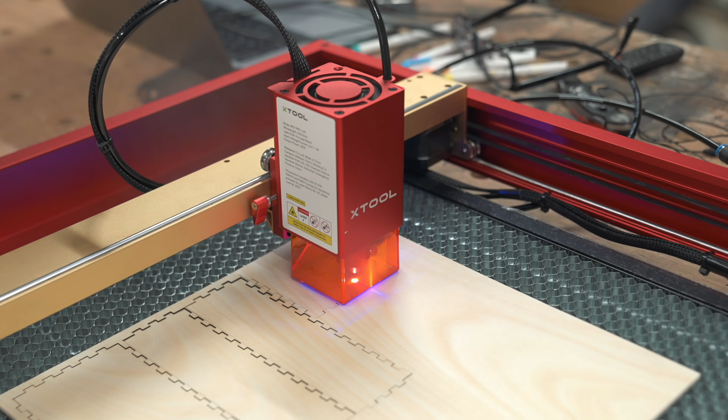A few years back, I built this office cabinet and then later made some drawer organizers using my laser cutter, which at the time worked great. But then over the years, I just started tossing anything in there as long as they fit the different size cubbies. And in the end, I was still having trouble finding exactly what I needed because this right here just doesn't organize anything.

So in this video, I'm going to show you guys how to easily model and 3D print custom organizers that give everything its dedicated spot so that they're always easily accessible, and more importantly, I know exactly where everything is. This is the epitome of a place for everything and everything in its place.

And of course, there are several ways to go about creating these custom bins. The easiest is just using the Gridfinity system that was developed by Zack Freedman and downloading pre-made models from their huge library, which is a great way to get started. But for me personally, I don't like to be tied down to someone else's design because what works for them or how they like to have things laid out might not work for me.

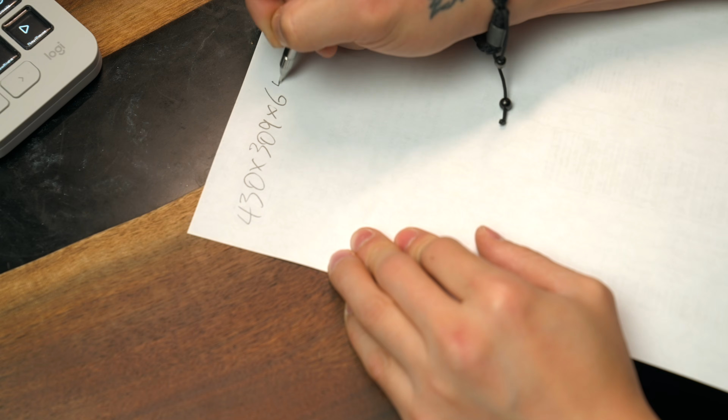And also, I have things that have a unique shape that doesn't have files available online, like the Space Mouse Pro that has this varying taper around the bottom, which we're gonna get into a little bit later in the video. But first things first. Using those dimensions, I sketched out a rectangle inside of Shapr3D, created an offset for the drawer thickness, and extruded it to the height of the drawer box. This sets the outer boundary of the space I may be working with. And now we're ready to start creating our custom bins.

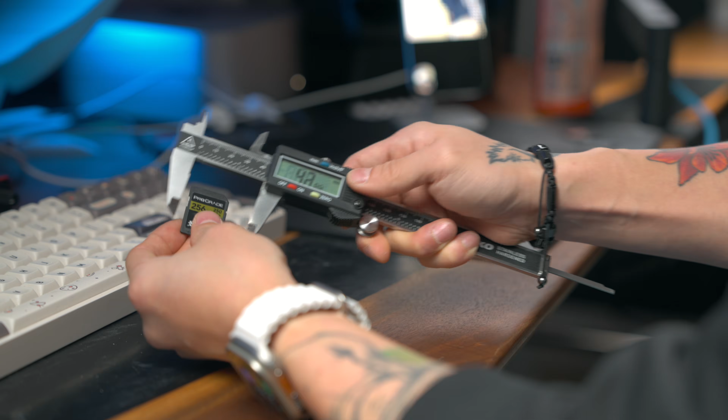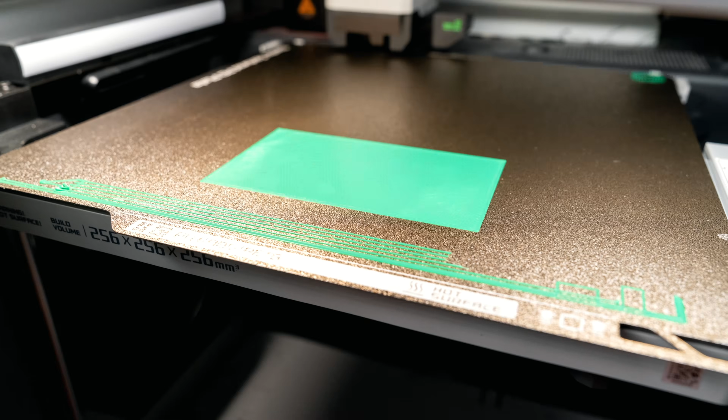So for things with a simple geometry like my storage drives, the easiest would just be to use calipers and a ruler. And after roughly laying out the drives, I went back into Shapr3D to sketch a rectangle and extruded that to make the base. Then on the top surface, I sketched a few more rectangles with the dimensions of the storage drives I measured earlier and pushed those down to make the cutout. And storing them vertically helps to maximize the storage space.

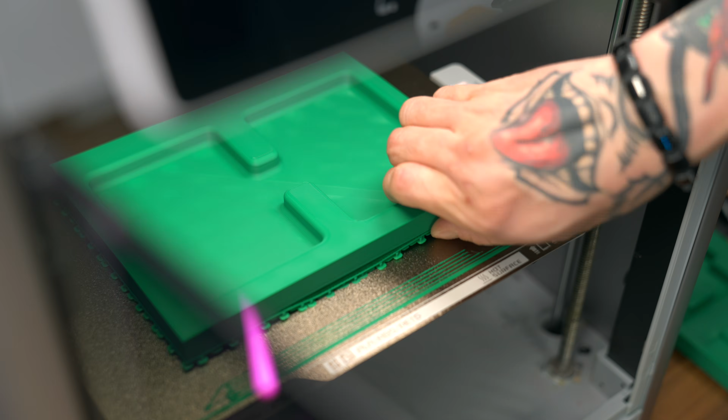Now for other objects that are also flat but they're just too large to sit in the drawers vertically, like this Apple trackpad, we can take advantage of the height and stack other flat items on top, like these portable power banks. And of course, we don't always need a custom bin for everything, right? So for these highlighters, on top of that is my favorite pencil, along with some refills and a wall charger.

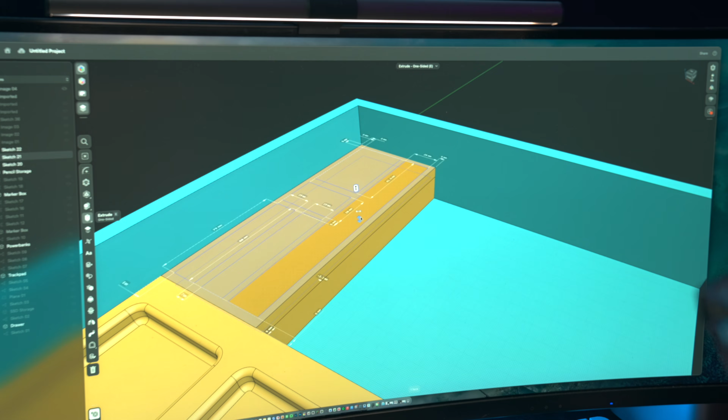Now, for all of these items so far, all I've been doing inside Shapr3D is sketching a rectangle, extruding it into the base, and then pushing profiles into it to cut out the basic shapes I needed for storing these items, and then pulling sharp edges to create any roundovers I might need. But for things with a more complicated shape, like this caliper, I use my phone to take a picture with at least 2x zoom to minimize any distortion, making sure that the phone is level.

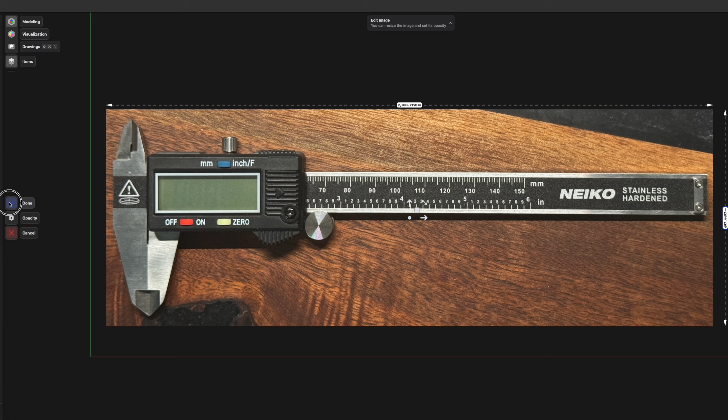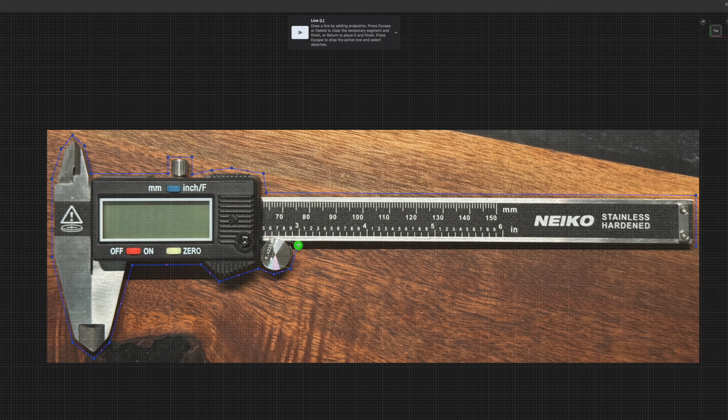After importing the image into Shapr3D, I sketched the line representing the actual length of the caliper and then adjusted the size of the image until it matched that dimension. So unlike before where I just used the rectangle tool to create the pockets in the base, this time I'm using the line tool to trace the image of the caliper, leaving about 1mm of space around all sides for clearance. The final profile is what I used to cut out the space I needed, and I also added finger holes so that I can easily grab and take out the tool. And once that's done, I also added space for my camera tool and a foldable ruler to the same print.

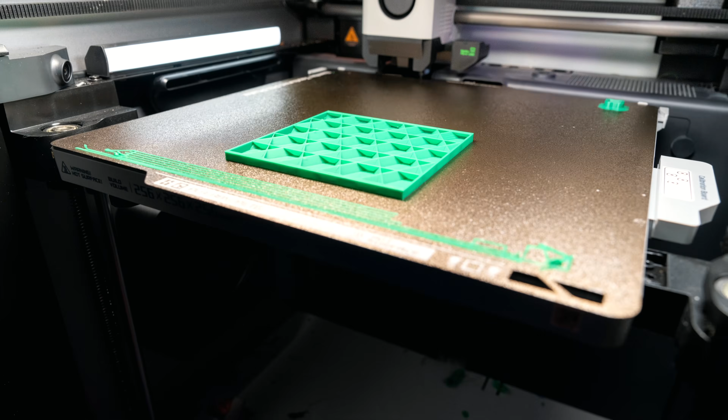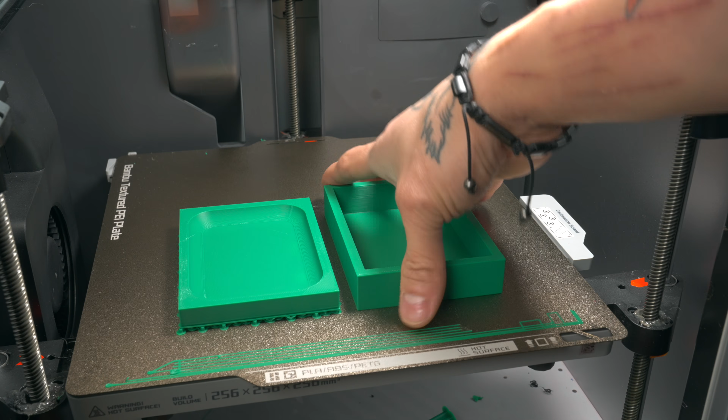I used that same method to create the storage for holding my wireless Space Mouse. And as you can see, we still have this little space we need to fill in, and I don't really know what I want to store in there yet. So for now, it's just going to be a couple bins for random things. Another miscellaneous bin for some smaller items, and a custom bin on top for my multi-tool and a couple of remotes.

So even when we're making a custom cutout for this guy here, we're still more or less using basic shapes, right? We're using straight lines and then we're extruding straight down. But like I said earlier, what if we want to make a custom recess for something like this, where the side face has this varying taper as it wraps around the unit? And at the time of me making this video, I have not found any 3D models of this guy or any custom bins on any of the 3D printing websites. So if we want to create a recess for this to sit perfectly into, we're going to need a 3D scanner.

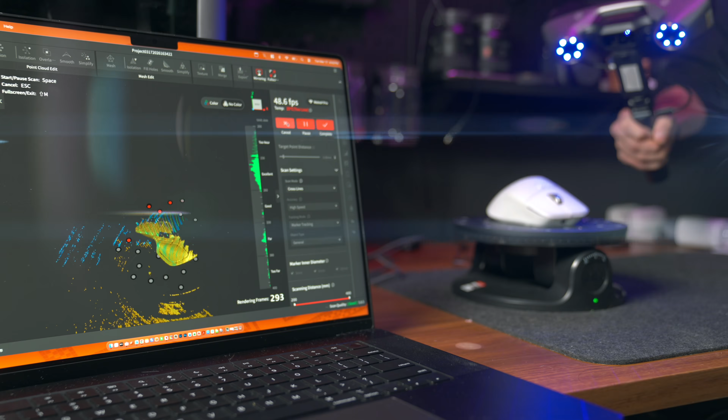This is the MetroY Pro 3D scanner that Revopoint sent me a couple months ago. It's a wireless blue laser scanner that's capable of capturing 2 million points per second. And usually if we're scanning a black shiny surface like the one on the Space Mouse Pro, it would require pre-treatment with a 3D scanning spray, because a black surface absorbs all the light while the shiny surface scatters the light away from the sensor. So this is possibly the worst case scenario for something like this.

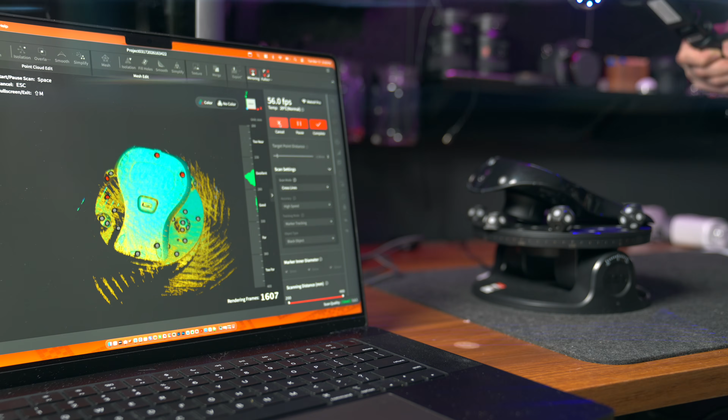But with MetroY Pro's advanced multi-line blue laser technology, I was actually able to get highly accurate scans of the surfaces without using any type of spray. Also, there's this new high-speed scanning mode, which relaxes the stitching angle tolerance, meaning that we can tilt the scanner further so that it's easier to get high-quality scans even when we need to make large turns like I do with the Space Mouse. So keep in mind that we're only creating a void for this part to sit into, which means we only need the data for the bottom face and the side face.

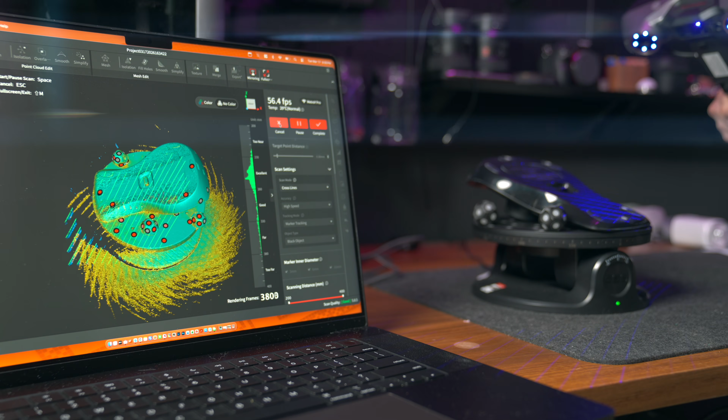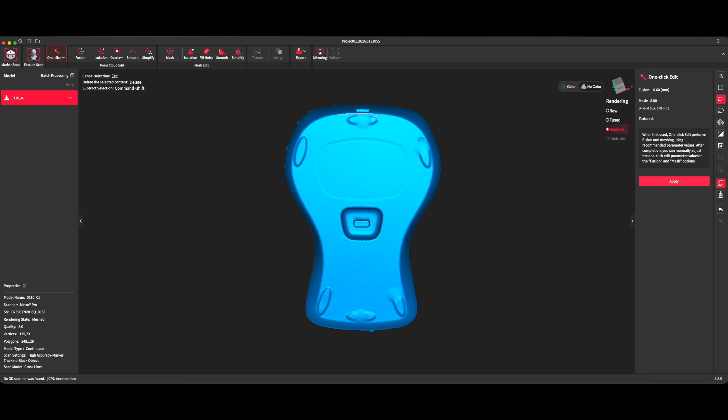So once I saw the model is all filled in, I meshed the data using the one-click edit option. The data, of course, also includes the rotating base. So to get rid of that, use the select connection tool, click on the Space Mouse, and then click on delete unselected content, making really quick work of that. I also use the polygon tool to pick and delete any details I don't need for our custom bin, like the feet on the bottom, the USB dongle, and the power button. And this process doesn't have to be perfect, but we do want to make sure that all the holes are filled in afterwards.

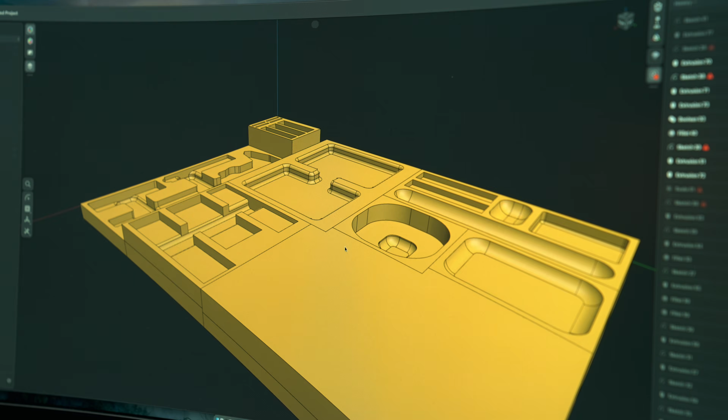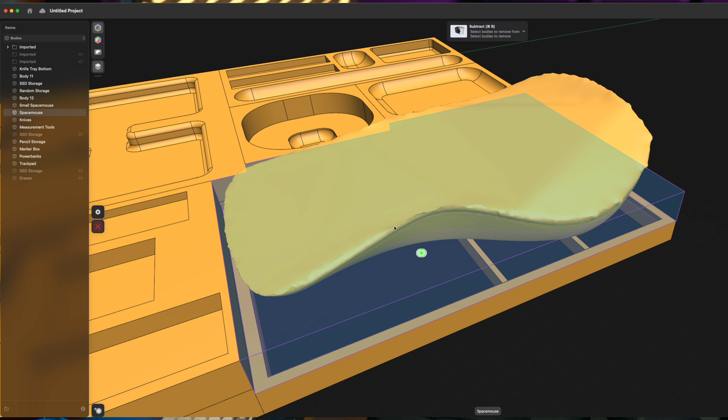What I love about this method is that once the mesh is imported into Shapr3D, or I guess any CAD program for that matter, it's already at the correct scale. So all we need to do is move the mesh into the position we want and increase the overall size just a little bit, because we are creating a void for the part to sit into. And I found that 1% was perfect for this case. Finally, using the subtract tool inside of Shapr3D, we can remove the mesh from our base and send it.

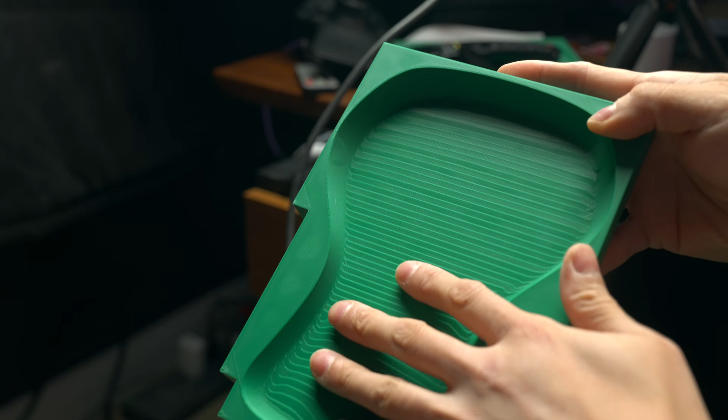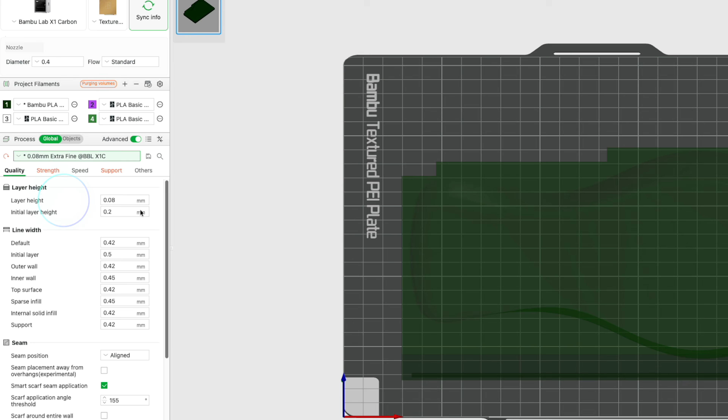So despite how perfect the Space Mouse Pro sits in the tray, you probably noticed that this bottom surface is quite rough. And the reason for that is because this surface is actually sloped, because I wanted this guy to sit in here at an angle. And since conventional 3D printers print objects in layers, what you see here are the layer steps for creating the sloped surface. One way we can smooth this out is by reducing the layer height, but unfortunately that's going to increase your print time and material usage. And even then, it's only going to make this a little bit smoother. So if we want to completely get rid of this, we have to

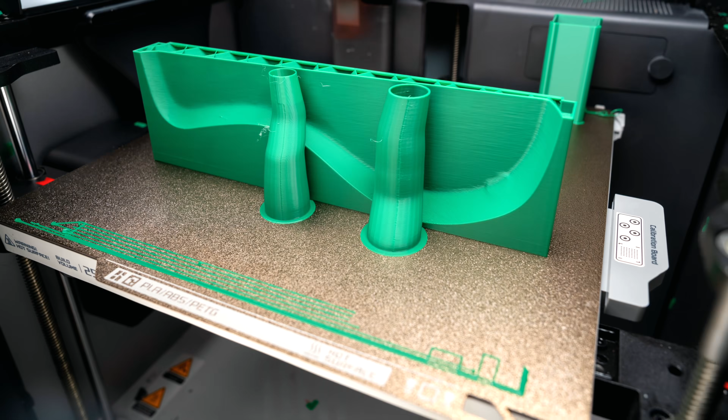The prime tower fell, so the print got a little bit rough at the end, but as you can see, printing this vertically completely removed the layer steps because it printed the slope on a single layer. But as you probably saw, we also had to add supports, which once again were adding to the print time and material usage. So was it really worth it? In this case, probably no, because all I wanted to do was create a custom pocket for this guy to sit into, which it does.

So that was my very first time using a 3D scanner, and to be quite honest, I was very surprised at how fast and easy the whole process was. And I was using the high-speed scanning mode, which allows me to tilt the scanner at a more severe angle and still get high-quality readings from the markers. So I think they said 30 degrees now, whereas in the past I had to keep the scanner at 90 to 45 degrees, somewhere in between that. So because now I can tilt it more, I can transition to the other faces much smoother, and that was really helpful for this case.

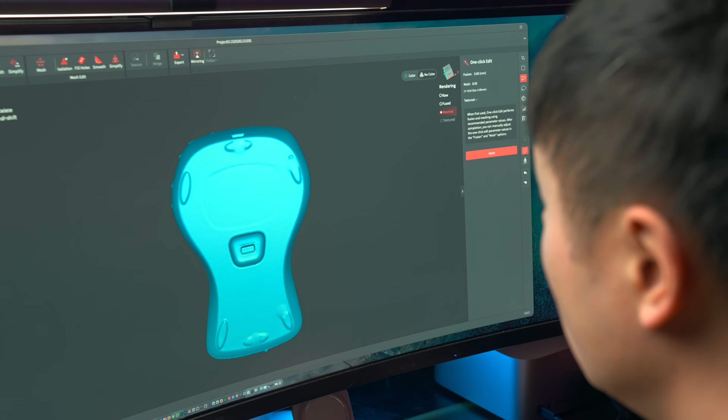Also, the software just made editing the mesh incredibly easy. I think it was just like 2 clicks and done, and also I didn't get any errors exporting the STL into Shapr3D. The two programs worked incredibly well together. Also, besides the automatic turntable, there's also a mobile kit included with the MetroY Pro that allows the user to attach their phone and stream the scan in real time via Wi-Fi 6 to the computer, which I think is going to be really useful for larger projects, or if later I want to do scans in the shop so I don't have wires running across the floor, right?

Yeah, so lots of potential for this, but you guys definitely don't need a 3D scanner to still have a beautifully organized space, because I feel like just knowing Shapr3D or any CAD program and having a 3D printer is more than enough. But then at the same time, I feel like if you know CAD and have a 3D printer, also owning a 3D scanner would just open up a lot of doors for what you can potentially create. So yeah, guys, hopefully this was helpful.